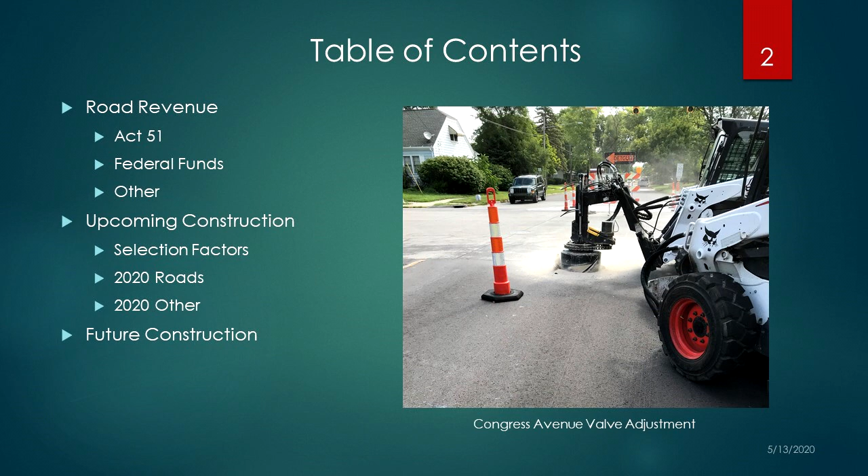First, I'd like to talk a little bit about road revenue, where our funding comes from. Then I'll move into the upcoming construction that we have planned for this summer. And then I'll talk a little bit about future construction in the upcoming years.

Also, I want to explain that originally we had budgeted $7.6 million for 2020, but that number will be adjusted through a budget adjustment based on revenue that we're projected to lose due to the effects of COVID-19 on the purchase of gasoline. The projected revenue, $7.2 million, is around $400,000 less than we originally projected for this fiscal year.

We expect this funding to be made up from the fund balance in the Major Street and Local Street Fund.

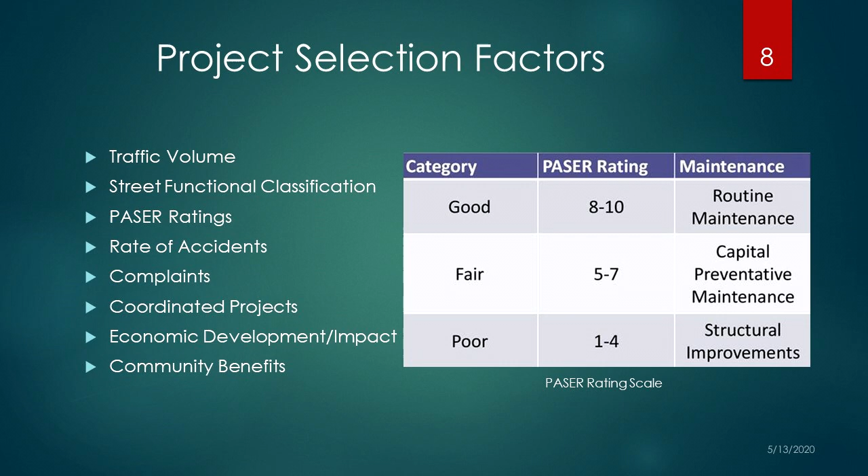Now we'll get into what we have planned for this year and what we have already started. We have our annual projects: Sidewalk Ramps, Cape Seal, a Mill and Resurface, and a Sidewalk Replacement.

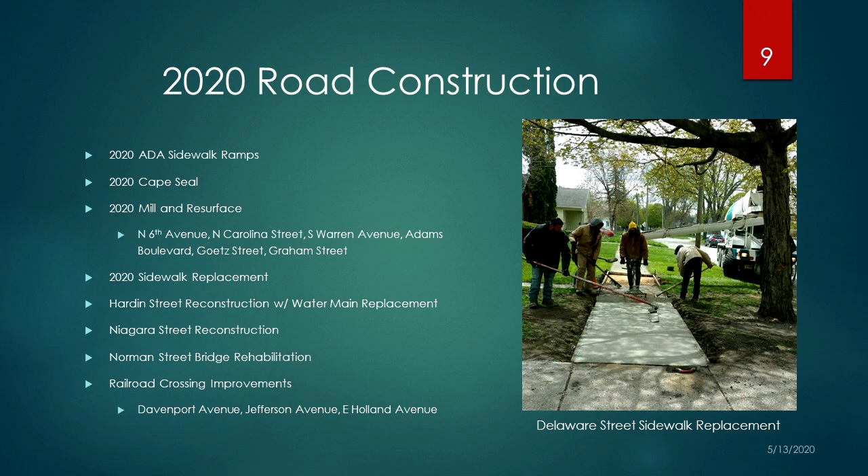We also plan to reconstruct Hardin Street. We have reconstruction of Niagara Street between the railroad tracks and Genesee underway. We have the rehabilitation of Norman Street underway, the Norman Street Bridge, and then we are going to improve 3 railroad crossings.

The ADA Sidewalk Ramp project is done every year. They start with locations we've received a complaint on, and then we expand in that same general geographic area so that we don't pay exorbitant prices to do one ramp in one part of the city, another ramp in another part of the city.

We try to keep them relatively close together and do whole intersections. If you put in one ramp on one corner, you have to have a receiving ramp on the opposite corner. That is part of the ADA law, and we comply with that.

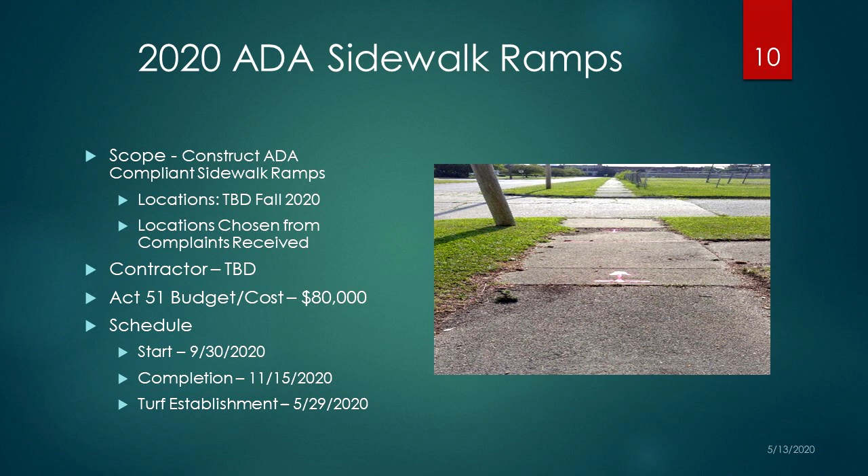We expect to bid this project out later this summer after July 1st, and we'll hopefully start in September and complete the project before the snow falls.

Our 2020 Cape Seal project started last week. The contractor is Fahrner Asphalt Sealers, a local contractor located near the wastewater plant up on Vets Memorial Parkway.

They started by crack filling. We have to do that procedure first, and then we have to wait 7 days before they can come back and apply the chip seal and micro resurface. They will be back next Monday.

The work is being performed on Hoyt Street between Washington and Genesee, and on South Warren between Holland and Hoyt. This is a project completely funded with Act 51 funds, and generally we'd like to see a PASER rating of 5, 6, or 7. These roads have PASER ratings of 6.

It is just a sealant. It doesn't provide any structural improvement to the road. It just seals the surface to keep water out, and it helps to rejuvenate oxidized pavement.

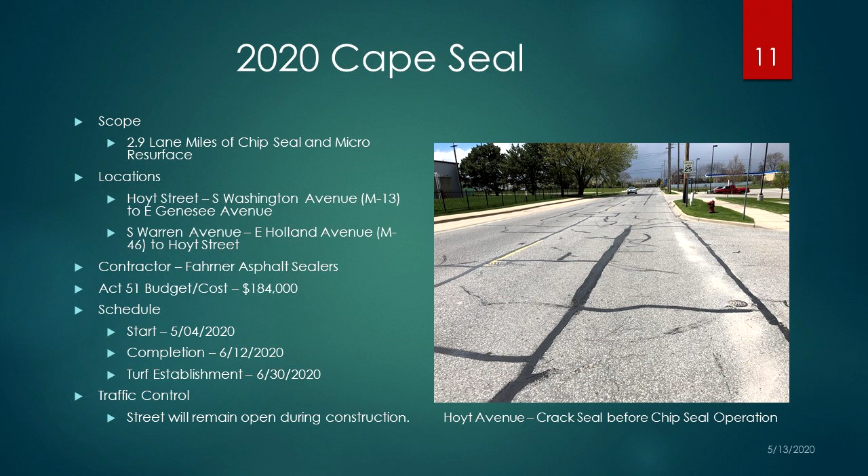The streets will remain open during construction, and we expect that this project will be done probably in the next 2 or 3 weeks.

We have an ambitious 2020 Mill and Resurface project, and this year we're combining some local streets and major streets. ACE Saginaw Paving is the contractor, and our street set, we will be doing our Adams Boulevard between Reynick and Alexander, Goetz and Graham between Mackinaw and Court, 6th Avenue from Genesee all the way up to Washington.

That's a very long stretch of roadway. And North Carolina between Court and Davenport, and Warren between Hoyt and Millard.

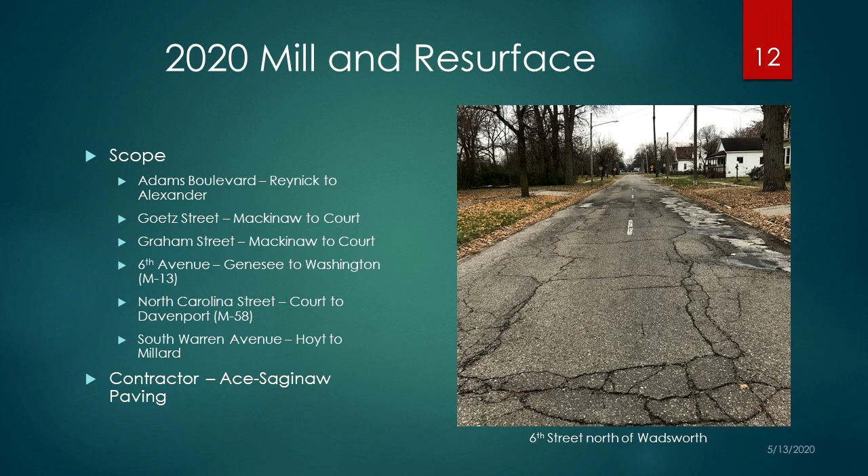Our budget is, we're using $575,000 of major street money and $225,000 of local street money. This is starting right after Memorial Day, and it should be done sometime in August.

Streets will be closed and detoured during the project. And I'd like to add that on all of these streets, our water and sewer maintenance crews have come in and taken care of or replaced any lead or galvanized water service.

They are very busy right now this week permanently placing pavement patches so that we can get in there and do this work. It's a huge undertaking to get all of this done so that we can come in there and know that they will not be digging up the road next year.

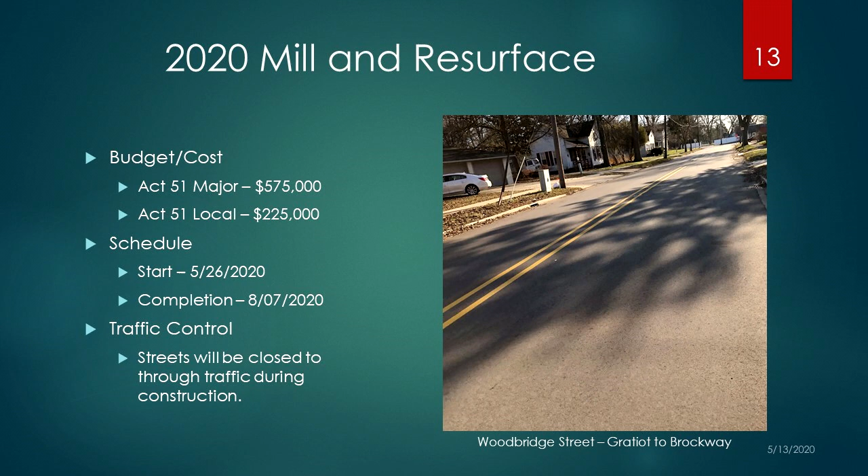The 2020 Sidewalk Replacement project is already underway. In fact, it will probably be done next week. And the contractor is Geiersbach Construction.

This is funded with major street, local street, and general fund money, but the residents will be billed for the costs per the city ordinance.

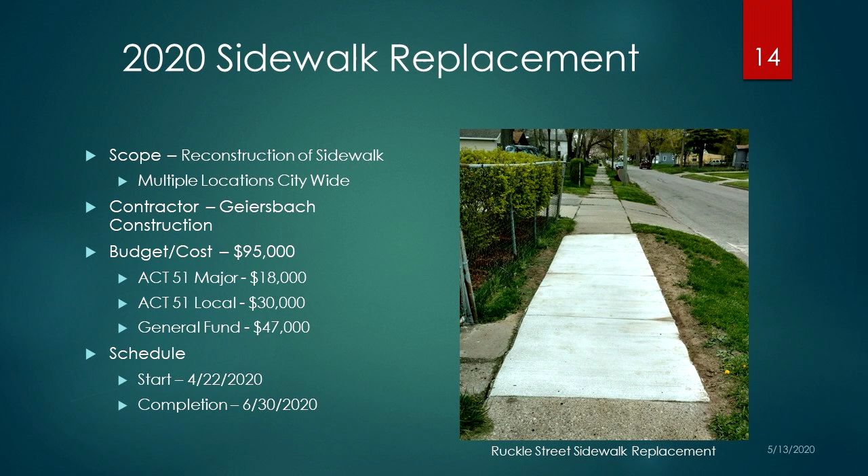We also have the reconstruction of Hardin Street in front of the Lutheran Seminary. That is starting right after Memorial Day. The roadway will be reconstructed with drive approach, curb and gutter, has a stretch of sidewalk on the south side.

That there's no sidewalk now. The Lutheran Seminary is going to move their fence back, and we will be putting sidewalk in at that location. We have drainage improvements, and we're replacing the water main.

The contractor is Blue Restoration. The bid was around $610,000. The funding is made up of road money, local street road money, sewer money, and water funds.

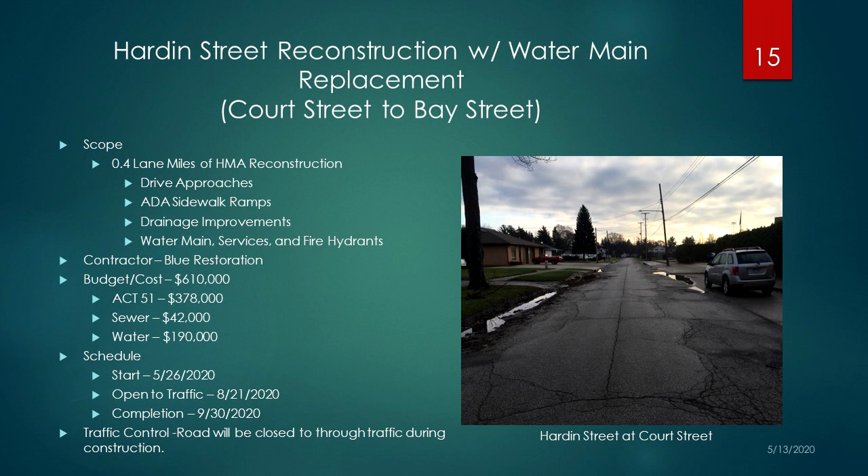And that project will go most of the summer. We're trying to get done before they open again, if they open again, but that was the plan in August. The road will be closed to through traffic during construction.

Niagara Street is our federal road project this year, and it's 1.2 lane miles of HMA reconstruct. The road is currently concrete, but it'll be put back like the area, like the road south of the railroad track, the asphalt. It will have new driveways, ADA sidewalk ramps, drainage improvements, and there are some water improvements.

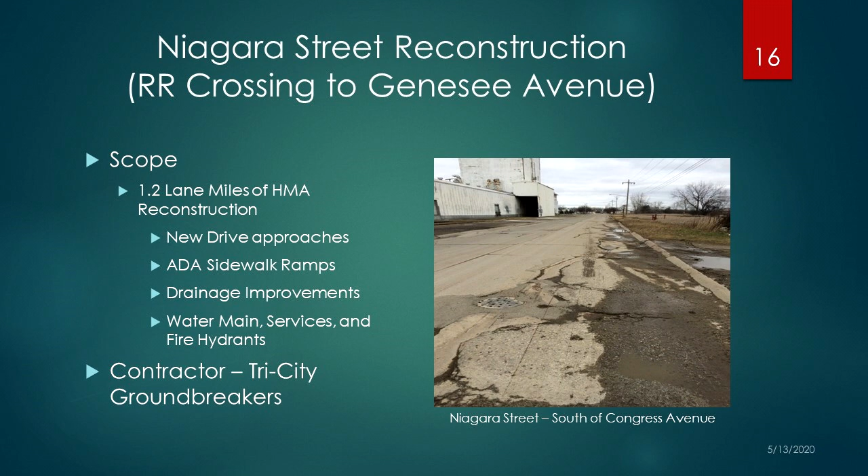Although most of the water main is not replaced as it's newer. The contractor is Tri-City Groundbreakers, and it's a $1.4 million project.

It's funded with $954,000 of federal road money. We are contributing Act 51 money and sewer funds and water funds for those costs.

That project started in mid-April. The contractor actually asked to start earlier. It was supposed to start in May, and we agreed to allow them to start earlier.

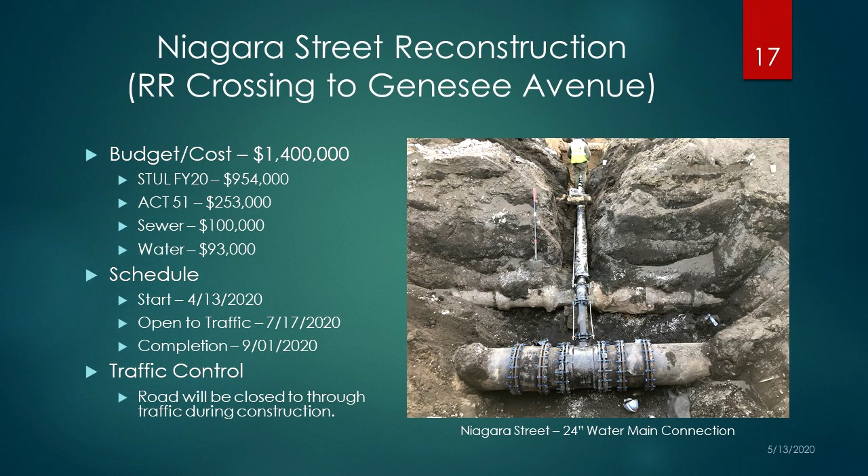We're hoping to have that project open in July, and the road is closed, and there's a detour in place on Michigan Avenue. The Norman Street Bridge rehabilitation is underway at this time.

That project is funded with $720,000 of state bridge funds. They ran out of federal bridge funds, and then we're contributing $180,000 of Act 51 funds. The contractor is Grand River Construction.

The whole superstructure, which is a bridge deck, the sidewalk, that will all be replaced, and the beams underneath are being rehabilitated or repaired, and there will also be reconstructing the approaches to the bridge.

That project started in mid-April. The contractor did start a little bit late due to COVID-19, and they had the right to do that. They decided to start on April 20th.

They're going right along, and it's quite a sight to see. If anyone is out there, they might like to see that.

I would like to say that in June, we closed this bridge. It was declared or deemed structurally deficient by the latest bridge inspection, and this bridge would remain closed if we had not done this project.

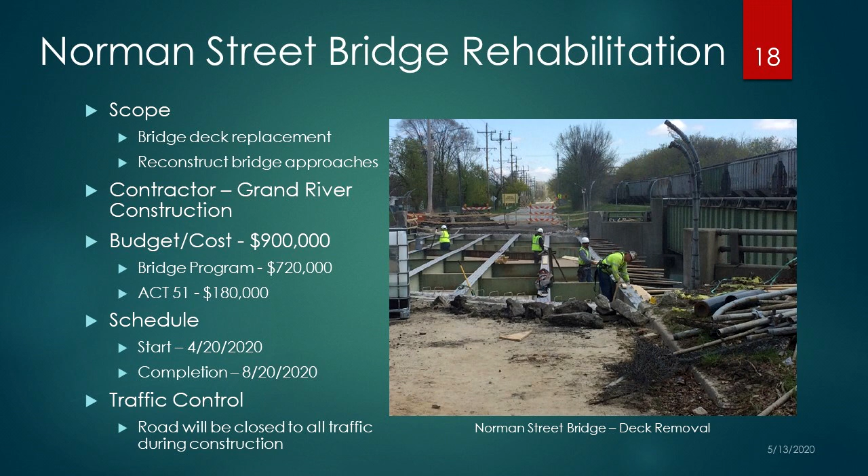We have 3 railroad crossings that we have planned to reconstruct, and we applied for what's called Local Agency Highway Railroad Grade Crossing Surface Improvement Funds. The local jurisdiction has to apply for those funds, but it provides 60%. The state pays the railroad for 60% of their costs, and the railroad has to pay 40% of their costs to repair their tracks, the asphalt or road surface between the tracks, and 18 inches on either side of the tracks.

The city or local jurisdiction is still responsible for the approaches, and we will be spending approximately $100,000 to do the approach work on these 3 crossings.

East Holland, which is east of Washington or M13, South Jefferson, which is down by our water and traffic facilities, and then Davenport Avenue, between Niagara and Michigan. Both Jefferson and Davenport were redone, resurfaced a couple of years ago—Jefferson was just done last year, Davenport was done the year before. But we're playing catch up, and we're going to do the part that we boxed out and did not do because it was in the way.

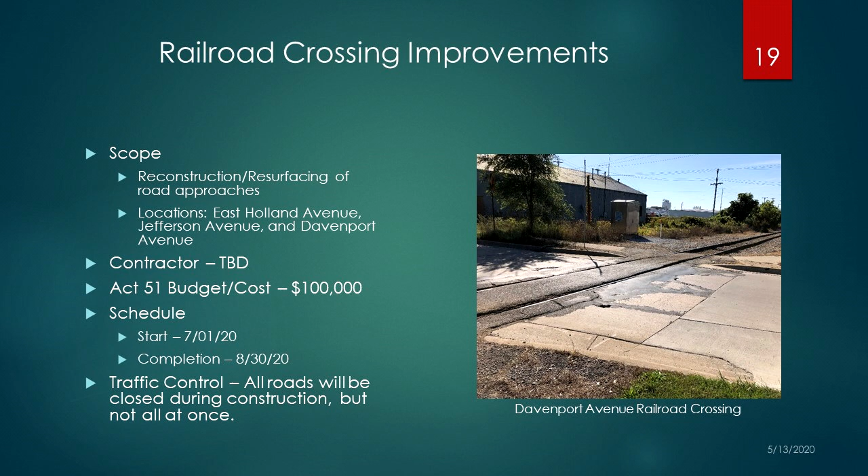Roads will be closed during that work.

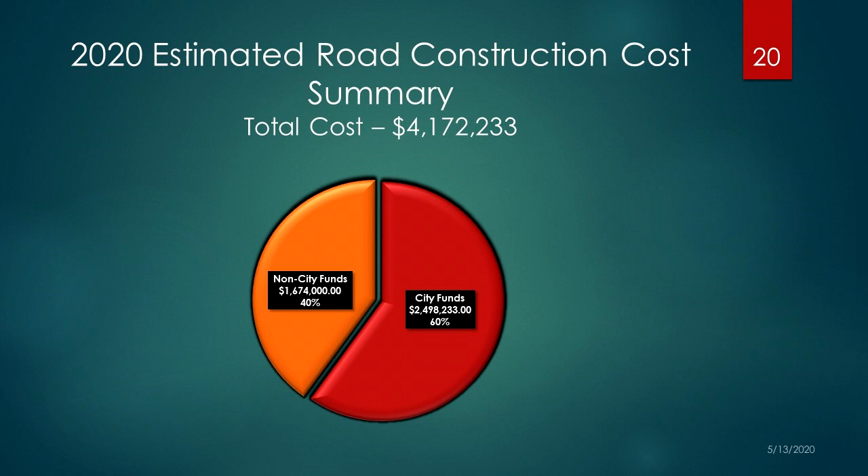This is just a pie chart that shows you that 40% of the funding we're using is non-city funds, but 60% of it is city funds. That would include anything water, sewer, roadway—it's all included in that amount.

Then we have a lot of other projects ongoing right now that are mostly tied to the general fund, with the exception, I think, of Davis Road.

We have City Hall fire alarm upgrades, the abandonment of water main on Davis Road, demolition of parking ramp number 1 at 220 Baum Street, the rehabilitation of the north parking lot on the north side of the public service building, building repairs being done to the traffic engineering building on Jefferson Avenue, and the Tuscola Street pedestrian pathway, which is kind of a streetscape on vacated Tuscola between Washington and Franklin Street. Then we have the resurfacing of Washington Avenue or M13 between Johnson and Potter Street.

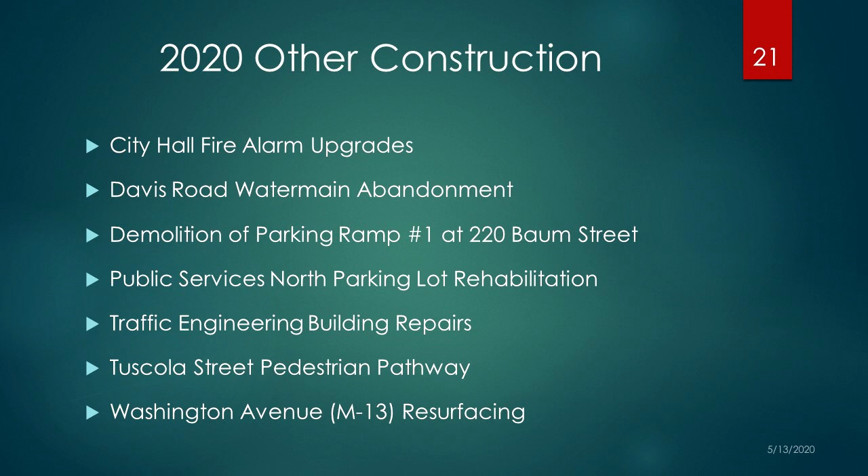The City Hall fire alarm upgrades is a project to bring this building up to fire code for the fire alarm. It's a $26,000 project. Audio Central is currently working on this project, and they should be done sometime by the end of July.

Davis Road water main abandonment: the 36-inch finished water and the 48-inch raw water supply lines under Davis Road are being abandoned as part of the Saginaw County Road Commission's rebuilding of Davis Road, and the contractor is M&M. This work is being done as part of the Saginaw County Road Commission's contract. It's an MDOT project, using federal road funds to rebuild Davis Road.

Our portion of the cost is $450,000. We will be paying that to Saginaw County Road Commission, since they're paying the contractor, and I believe those agreements have already gone to council. That project is currently underway and is expected to be completed by the end of October.

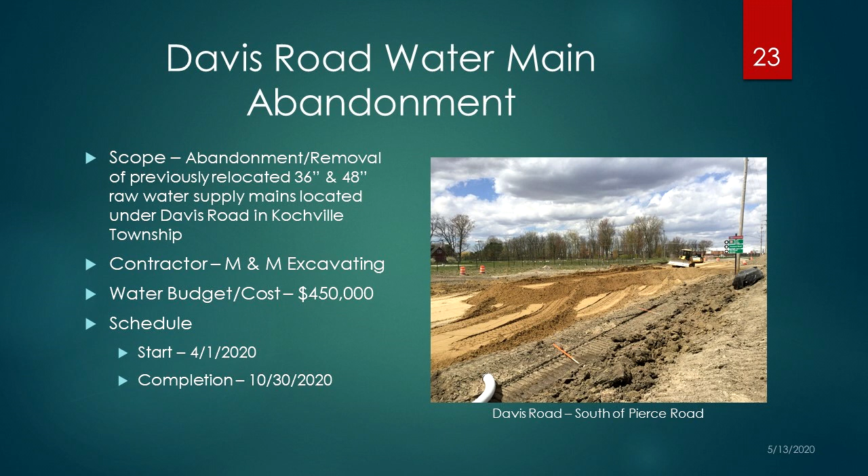Demolition of parking ramp number 1, down in the block bounded by Baum, Franklin, Federal, and Janes. The pre-construction meeting was held last week by phone with Dore and Associates, and they will be starting probably within the next 2 weeks.

The cost right now is $744,000. That includes $105,000 of asbestos abatement, which is what they'll start with. That project will be completed hopefully much sooner than the end of December, but probably sometime this summer. The city plans to build a parking lot at that site when funding is available.

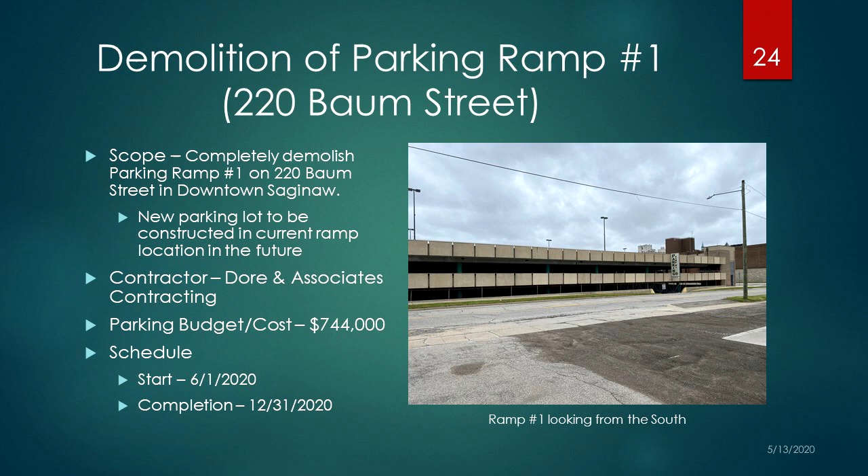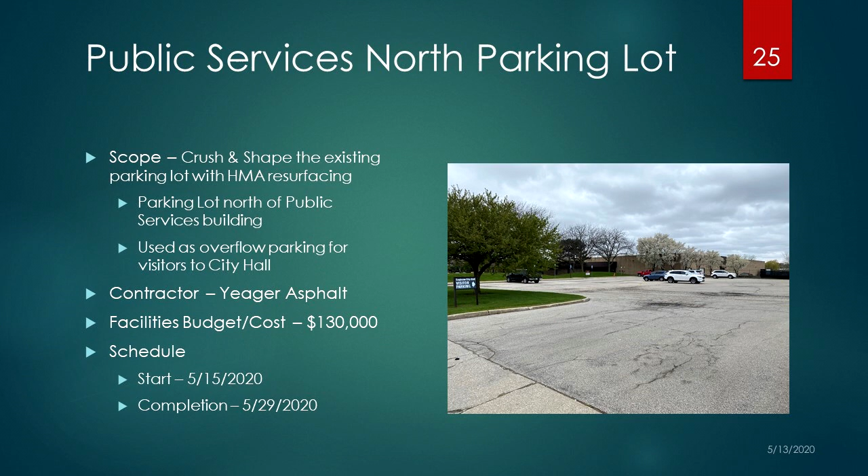This Friday, we're going to start a project to refurbish the parking lot on the north side of the Public Services Building—it's a crush and shape, and then a resurfacing. There is some minor curb work, and the contractor is Yeager Asphalt. The cost of this project is $130,000, and we expect it to be completed in 2 weeks.

We have a project starting sometime by the 1st of June for repairs to the traffic building, which is over on Jefferson Avenue. We have a leaky roof, that's what you see in the picture, and we also have a wall that has some damage. The project will take care of both of those things.

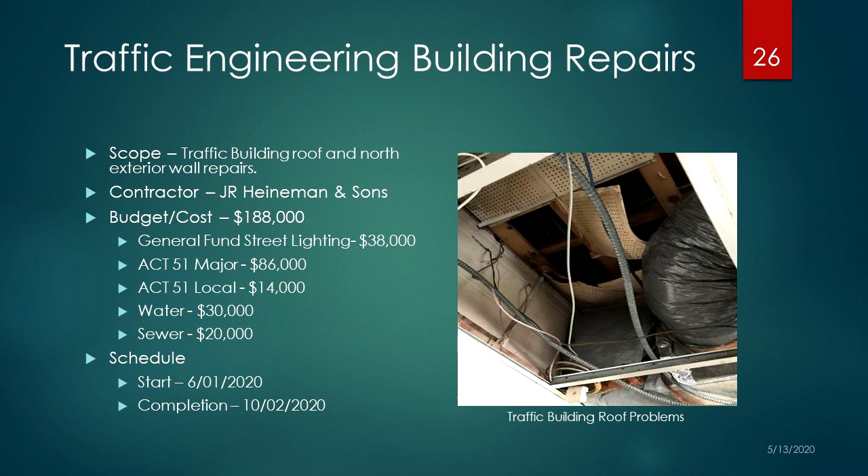The Tuscola Street pedestrian pathway is a conversion of this vacated Tuscola Street to a pedestrian walkway with street amenities like benches, lighting, planters with vegetation. There's bollards on there, it's a decorative sidewalk. And not only does it have decorative street lights like you see downtown, but the plan has strings of lights across it, making it a very inviting place.

That project, right now, we did take bids on it. The bid is over the amount of our available funding, so we're currently looking for other funds to help fund this project. It was scheduled to start right after Memorial Day, but that's likely to be delayed.

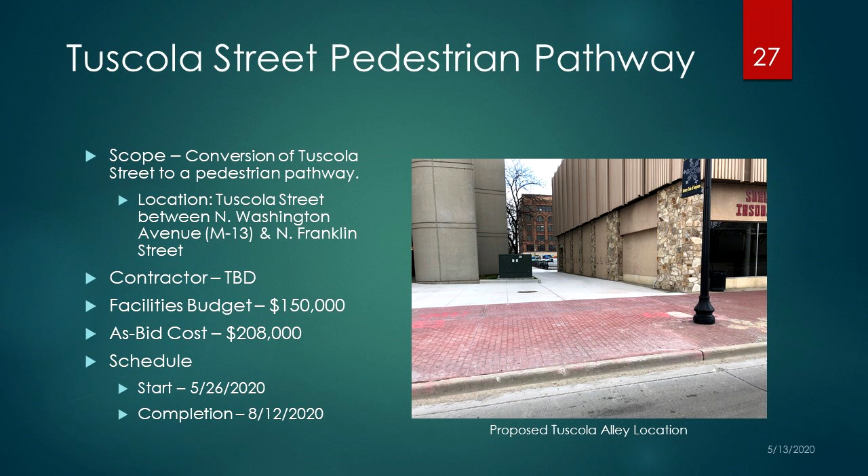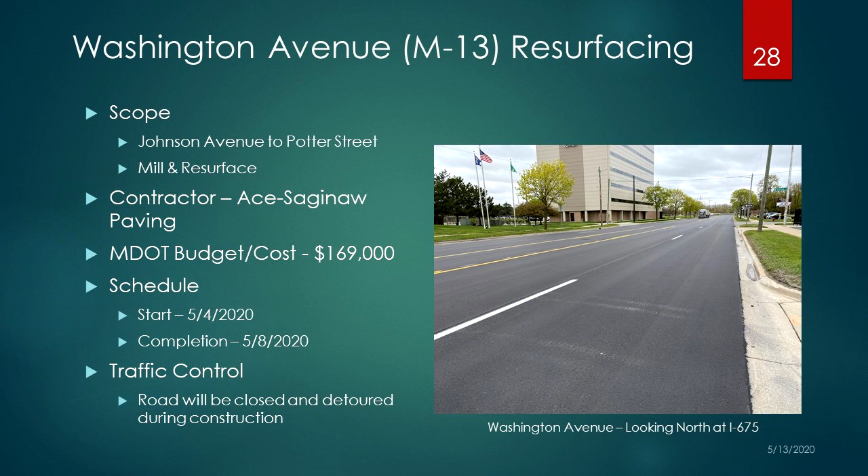This project is already done, and hopefully everyone has noticed that, but the state used maintenance dollars to mill and resurface Washington between Johnson and the Dow, Potter Street, and the Lake State Railroad office down there. It was $169,000. I have that on here because we actually bid the project, we awarded it, and they will reimburse us for all construction costs, and they also reimburse us 8% of that cost for our overhead and costs affiliated with bidding the project.

This year we talked to the streets foreman. He didn't really want to say where he might go next to spend some money to do some road repairs. The needs are everywhere, and we did reduce the budget a little bit this year. We generally have been budgeting about $500,000, and this year we decreased it to $440,000.

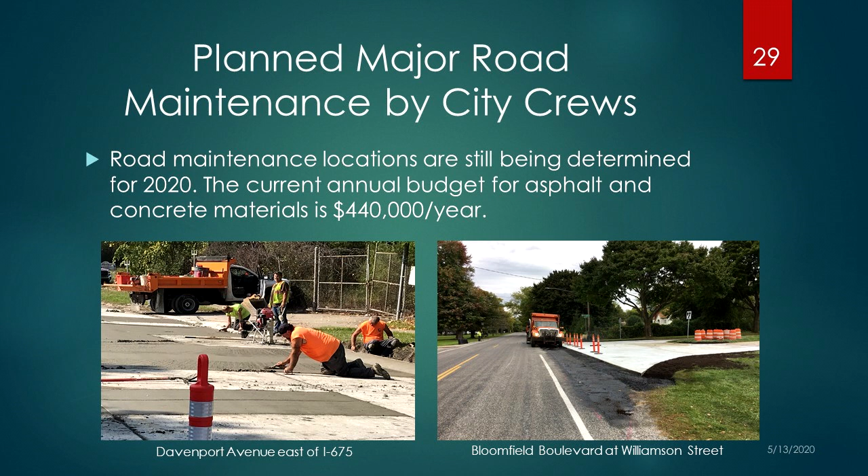Last year they resurfaced 23rd Street between Weber and Hess, and they also did extensive concrete repairs on Cumberland between Hess and Weber, same area. These are pictures of some of the work they did in previous years.

These are just some lists of our future construction. This gives everybody an idea of where we intend to go. There are other things not on here, but in general we want to keep going with our annual projects: our ADA sidewalk ramp project, our sidewalk replacement project, our mill and resurface, our cape seal.

What we'd really like to add, and we tried this year but had to cut it because we didn't have enough money, is an annual concrete road repair project. It's our goal to eventually be able to have that on here also as an annual project.

The fifth project down there, Mackinaw Street, the reconstruction between Alexander and Hamilton and water main improvements, is our big federal project that is currently under design, and we're hoping to have that turned into MDOT within a month for next year, for a January bid letting of 2021.

It does have a new water main in portions of it. We also are expanding our work scope because all of the manholes are brick, so they're going to be replaced. We're replacing all catch basins. It's a huge project, a very long stretch of roadway.

Also we have 17th Street here. This is our 2021 Community Development Block Grant road, which we have not done yet. That's under design as well, from Whittier to Walnut, and that's a rehabilitation. The intersections are concrete, the blocks in between are asphalt. And I know water and sewer have already been in there and replaced all their lead and galvanized lines, so we're hoping to get that designed.

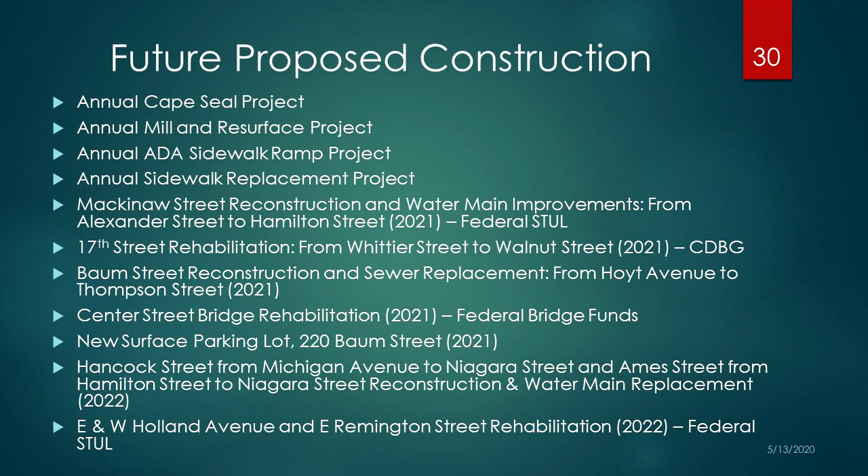And then we're just rounding this out with some of the future things. We've already been awarded bridge funds three years in advance, so we just received notification in December that we have 2022 funds for the Genesee and Holland Avenue bridge projects. We also have Lapeer Street on there.

We applied for community development block grant funds for 2021. We don't know yet whether we'll get that. That's a continuation of the Lapeer Street reconstruction and water main replacement.

We have Hancock and Ames on there, both between Michigan and Niagara. We want to reconstruct those with new water main, except there's no water main between Hamilton and Niagara on Ames. The other three blocks would have new water main, and that's a project we keep pushing out a year because we're waiting for development to happen at the Case Funeral Home. We'd like them to do the development first so we know where they want the drive approaches and utility hookups—we don't want to have to dig up the new roads. So once we have an approved plan, we can work with them and get those roads reconstructed.

We do have a plan to construct a multi-use pathway through Wickes Park Drive that will be part of the current Riverfront Trail and Iron Belle Trail, going all the way from M13 up to Fordney Street. We've applied for the DNR grant and now they've received it. We did have to provide some additional information that's due Friday, so we're hopeful we'll receive that money. That would be a project done in 2022.